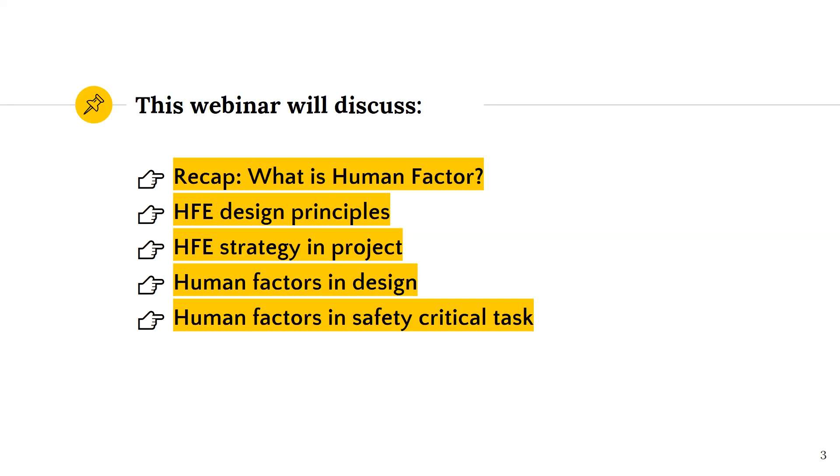What we will discuss today, in maybe less than an hour, we will try to recap what is human factors, because the title of the webinar includes HFE. Hopefully the participants who registered for this webinar understand what HFE, human factors engineering, means. We'll try to cover the HFE design principles, HFE strategies in projects, and human factors in design. I'll divide it into two parts: human factors in design, and human factors in safety critical tasks. But I'm not sure whether we have enough time to cover the last topic, since it's a very huge topic to discuss. Maybe we can cover up to human factors in design, and arrange another session for the last topic later. But if we have time, I will cover a little bit of it.

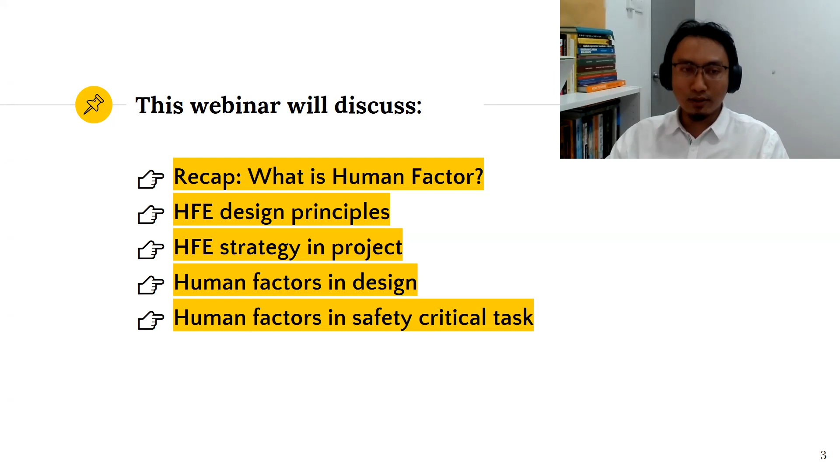Along the presentation, I will share the major challenges based on the slides I prepared for you guys. So, what is human factor? This is a definition by IEA, but I hate to start with this kind of wordy definition. I would like to start with a simple situation instead.

How do we understand human factor? This is a toilet door, maybe at our home, with a lighting switch, and we have a laundry basket there. That's the common arrangement in the house, in most of our houses. That's the design of the lighting switch.

So one day, maybe during this webinar, our children want to wash their hands in the toilet and ask us to switch on the light. Because we focus on the webinar or other work, we cannot attend to our kids. Let's say our kid is around 5 years old, which normally understands how to use the toilet.

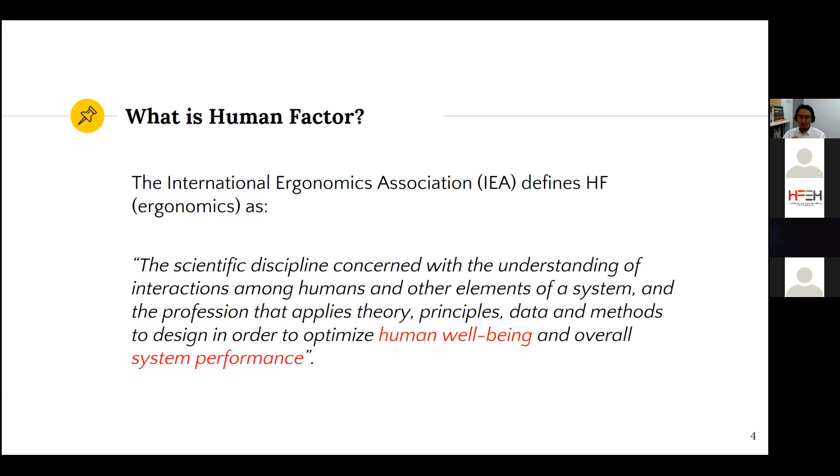That's a very simple analogy to understand human factor. So if we go back to the definition by the IEA, there's a combination of knowledge applying theories and principles, but the end goal is to optimize human well-being and system performance. So it's exactly what we did for this toilet switch.

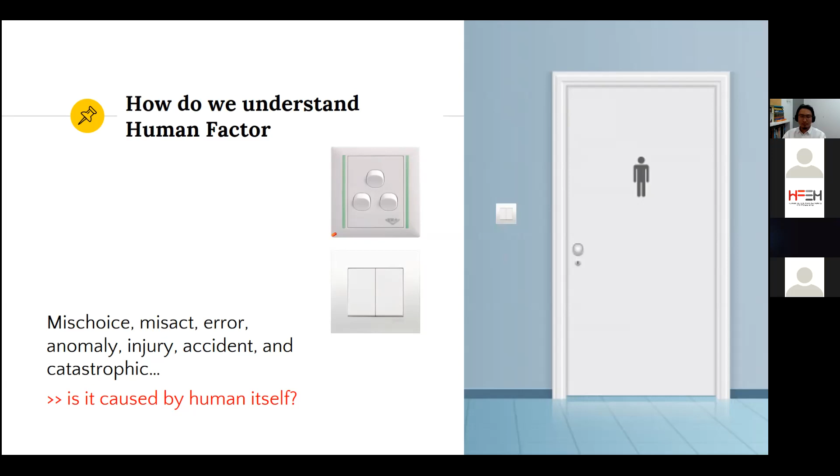And at the same time, when we lower this down, first our kids can use it safely, and secondly, we design for the disabled person using a wheelchair and so on, especially in public areas. So that's human factors - factors that affect human performance, right?

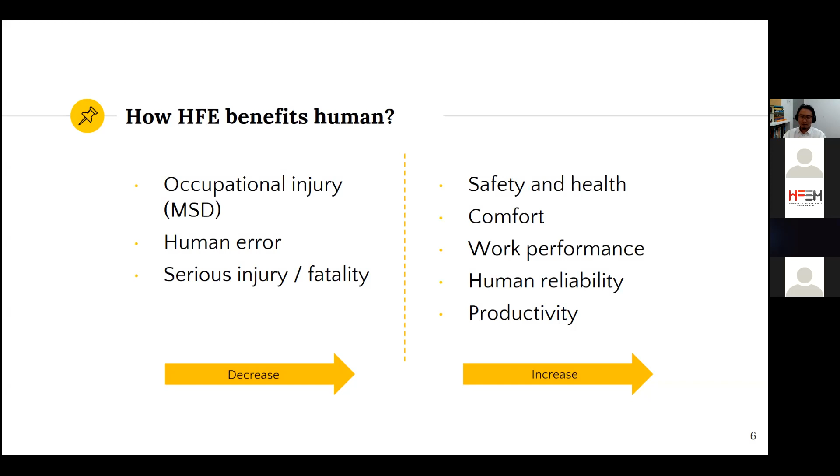So what we gain from this modification is we have decreased human error or accidents, or in the wider concept, we decrease occupational injury in the workplace and increase safety and health, and increase the comfort of users in work performance, human reliability and productivity, which covers a broad scope of workplace design. So that's human factors.

But within these facilities there are a lot of components, not only the lighting switch, but a lot of components that build this FPSO. For example, this is the structural system for the overall topside of the FPSO. You can see all the components of the structure.

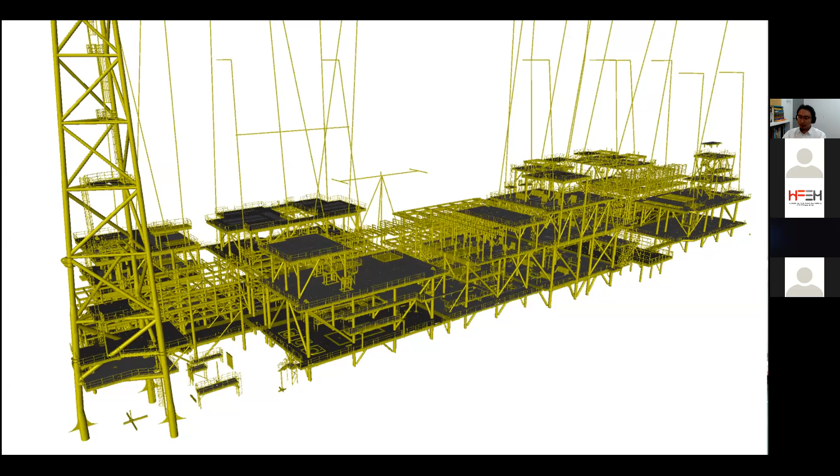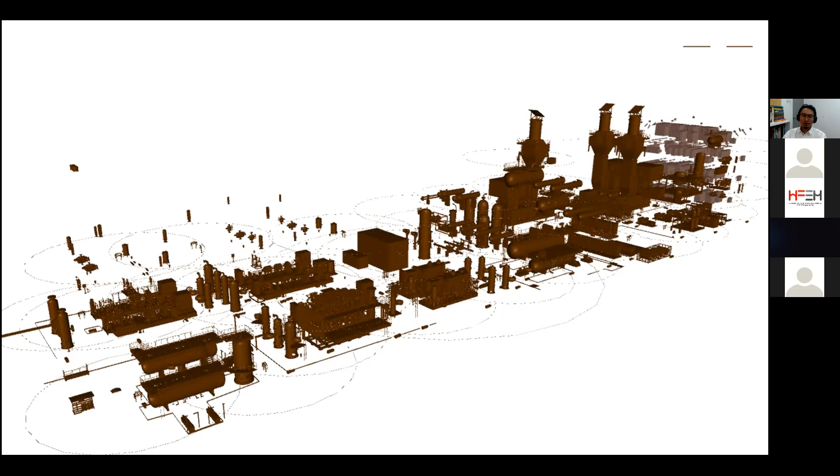At the same time, we have a mechanical system. There's a lot of mechanical equipment to store or process, to generate power, to generate water, HVAC equipment. At the same time we have electrical, we need to transfer the power and make this live in the facility, so there's a lot of electrical cables going around.

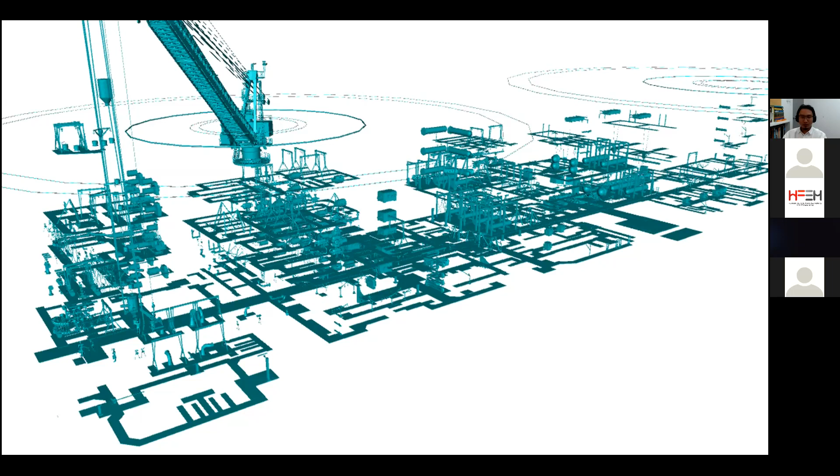And this is a material handling system for maintenance and operations. Within the same place we want to integrate the material handling system within the FPSO, so all the systems create this complete FPSO. That's why we call it that.

At the same time, during operation, people will operate this facility and live there, maybe up to 20 years, operating and maintaining these facilities, involving human interaction with all the systems. So we call it a complex socio-technical system, where we need to address human factors concerns in the design. So how are we going to implement this?

With this complex system, it involves a lot of other factors. For example, we have equipment, organization, environment, tasks and procedures, and people itself. All these components have detailed items. For example, equipment involves technology, the layout of the equipment, and HMI.

For tasks, we need to operate the equipment, do inspection, calibration, and maintain around 20 years, and we need to do material handling to replace any component in the system. All these components will influence human behavior, action or inaction throughout the lifetime of the facilities.

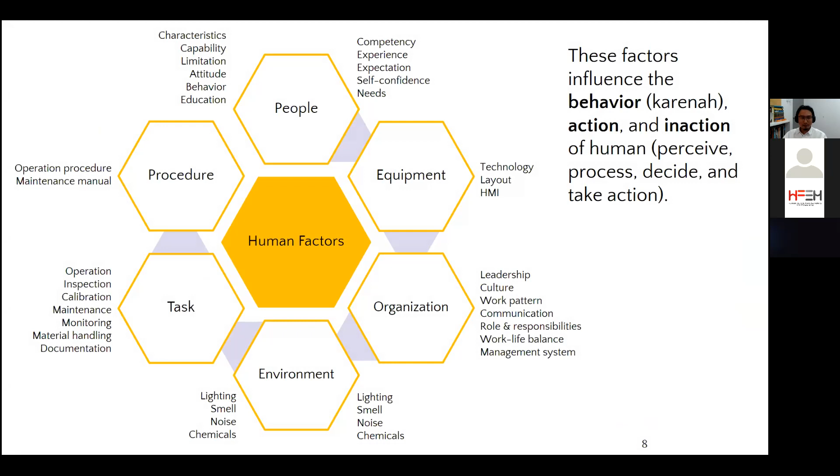So when we design the equipment, when we design the tasks, when we design the procedures or environment, we will consider all these design principles. We integrate everything in the facility.

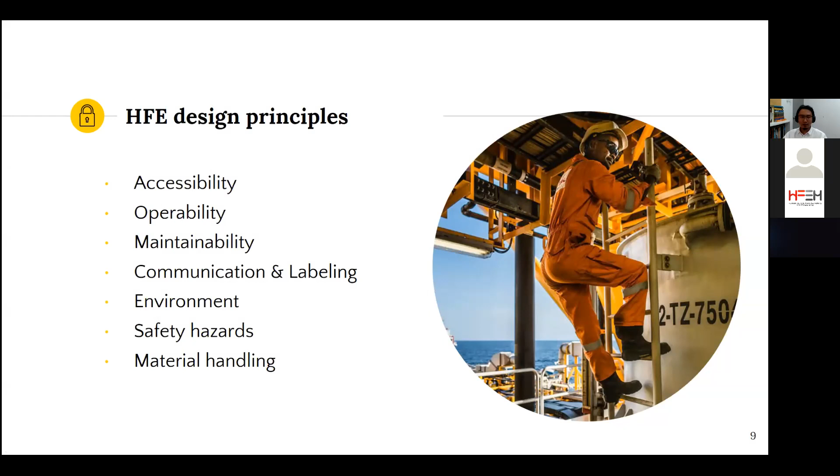So what are the complex systems that share the same concept with oil and gas? It could be palm oil plantation processing, because it involves a process line, manufacturing plant, oil refinery, of course, a nuclear plant, healthcare, OT is operation theater.

This is very important because when you involve a very precise operation - for example, I have experience with my daughter, my daughter has a heart disease. So when we went to IJN for the operations, we were given the opportunity to enter the operation theater, which is a very complex operation theater in IJN for heart surgery. So I could see with my own eyes how advanced the facilities and the setup of the OT are for the precise heart operation. So a lot of human factors are involved.

In fact, a lot of stories we heard from IJN about failed operations or human error during operation that caused heart bleeding and so on.

Okay, military base, of course, airport and control towers - we have Captain Kanadia, I think he's an expert on airport and control tower HFE things. And the railway system, for example, MRT or LRT system, involves a lot of human machine interface.

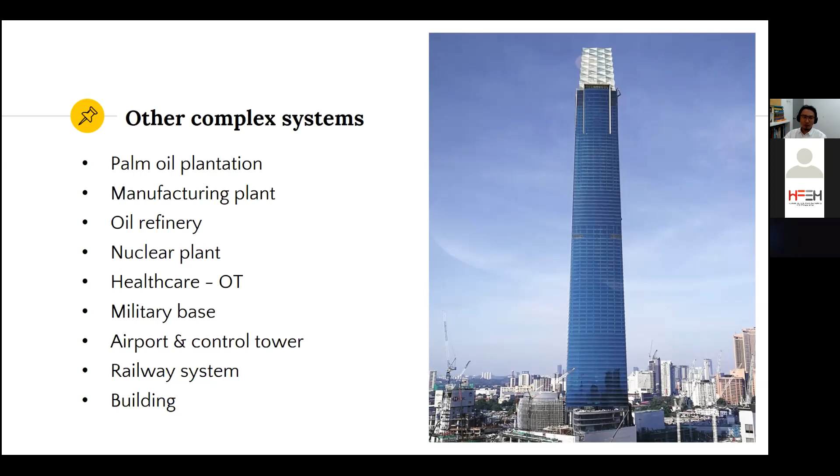This is the engineering design stage in oil and gas. So I believe our participants from the oil and gas industry understand this flow. But for other industries, I believe they have their own design stage.

Basically it's almost the same - maybe they apply the same concept, which is starting with conceptual select, or we call it select - some clients call it select, but some clients call it conceptual. And we move to front end, which is the defined stage, and we go to detailed design, construction, and operation. So for the HFE implementation, there are a lot of activities there, but we need to align with the purpose of each phase.

For example, during front end, what is the purpose of this phase during the design stage? They want to study the technology, explore its availability, finalize the size and weight of the platform, and come up with cost estimation to develop the facility. After they finalize that, they go to detailed design and produce drawings for construction.

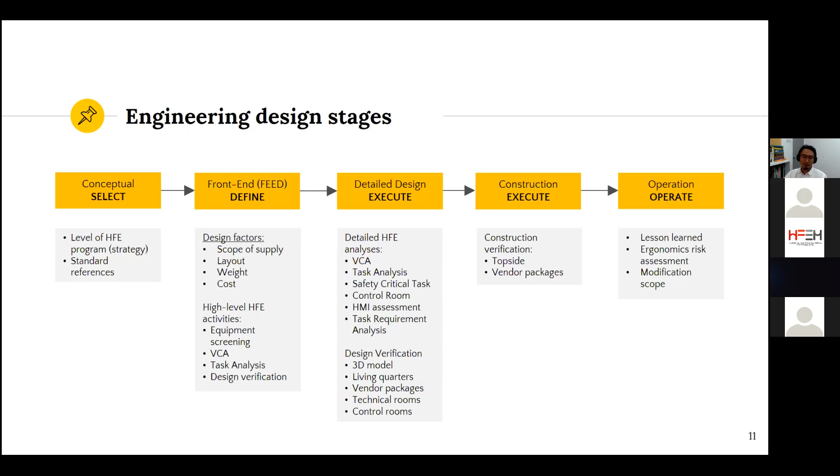Okay, so it goes up to the operation phase. But for this detail, I think before this we had the webinar about engineering design stage for HFE implementation, delivered by Dr. Adil himself. During that time he already explained in detail, stage by stage, the HFE implementation, so I just cover the very brief one.

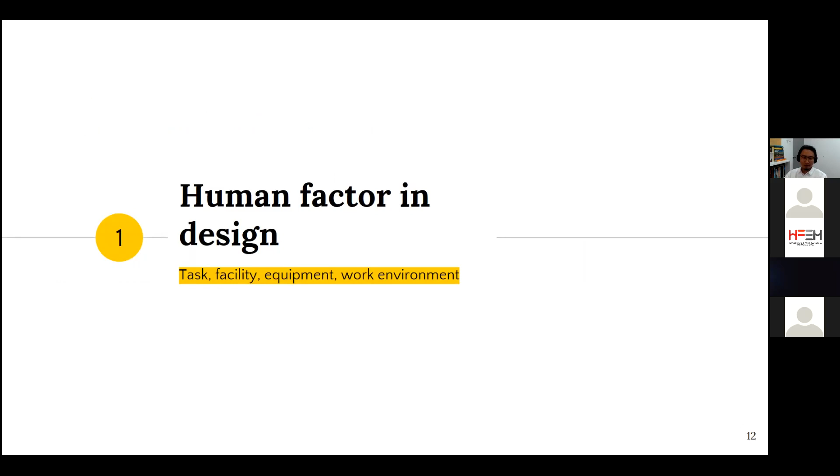So we try to look into human factors in design and what is the challenge along the design process. I'll share a very simple item that we tried to improve in terms of HFE for ergonomics.

This structure is under the structural discipline, so what I did is contact the structural discipline. They said this is not finalized yet, meaning there is a possibility that I can suggest a better design considering the ergonomics factors.

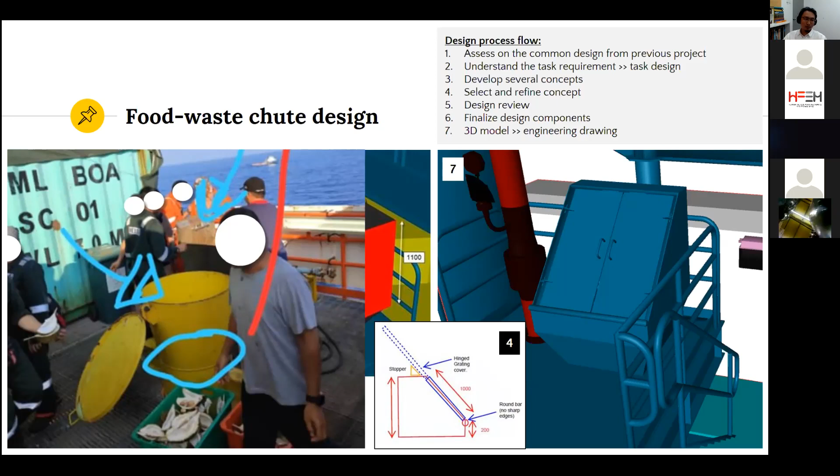And then what we can do is try to explore several design concepts, because we already understand the standard waste bins they use, and the task sequence they do for this activity. So we try to develop several concepts to improve the design.

If you can see number 3, this is the first concept that did not happen, and number 4 is one of our friends who happened to suggest this better design. After we discuss, we do the design review and finalize the design component, coming up with the 3D model like this, which has a door to avoid people falling down, is slightly lower, and has a round bar to support the bin load so you can dump into this food waste chute with less effort and safer. That's the final design.

We generate engineering drawings and construct these items. Of course, the design can be argued, but as long as we can justify it, this is a good design. We have designed the task properly to mitigate the ergonomics risk. That's a very simple example of how the design process happens.

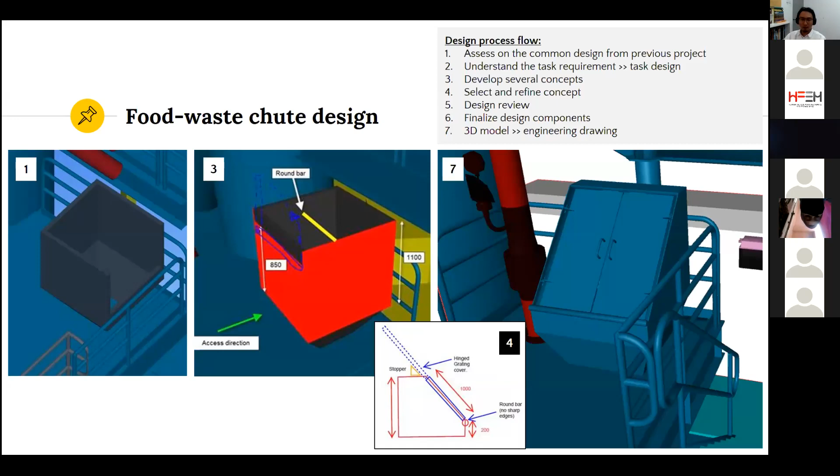We go to a little bit more complicated design, which is a piping system design. Normally there are several steps when they design the process piping system. Normally they start with the P&ID, or before that they have a PFD, process flow diagram, which is very general.

Later they detail it up in the P&ID. P&ID is a piping and instrumentation diagram. So in the P&ID, I can show the development of the piping.

The P&ID is very simple. There is one line here, and there is a valve. From there, we can identify the type of valve and whether it's normally closed or normally open. And there is a PSV there.

During this P&ID stage, from the HFE point of view, we do the valve criticality analysis. We do the valve categorization, categorizing valves according to C1, C2, or C3, depending on the criticality of the valve. Normally a manual or standard valve we put as C2, and a critical valve like a shutdown valve we put as C1, for example.

From there, we determine the accessibility requirement, whether we need a proper platform or can operate from a ladder. At the same time, we propose a design recommendation. If the valve needs to be CSO, car seal open, or maybe there's a discussion to change the type of valve from manual to motorized because of the operation requirement.

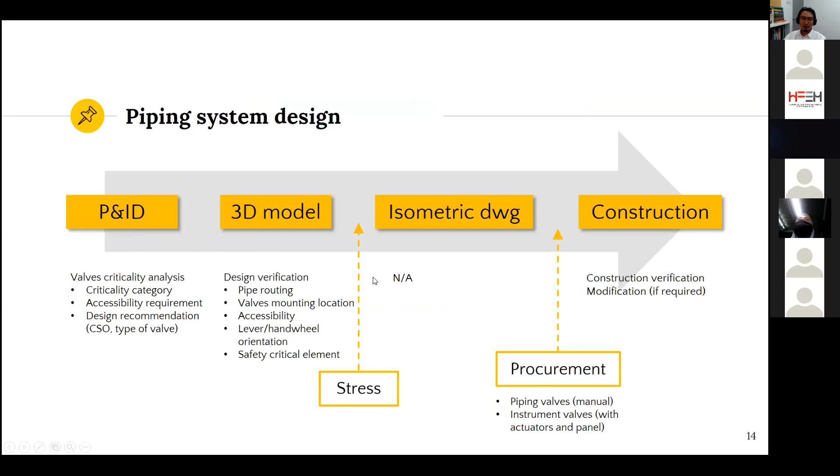So the challenge is how HFE can cope with or intervene through this process. When they do the construction, if you see the line, it's exactly like the 3D model, but at the same time there's a cable tray, an instrument pole, and structural elements. We need to consider all this in the 3D model design verification.

So we need to take care of the space availability to access the valve and to climb up the ladder.

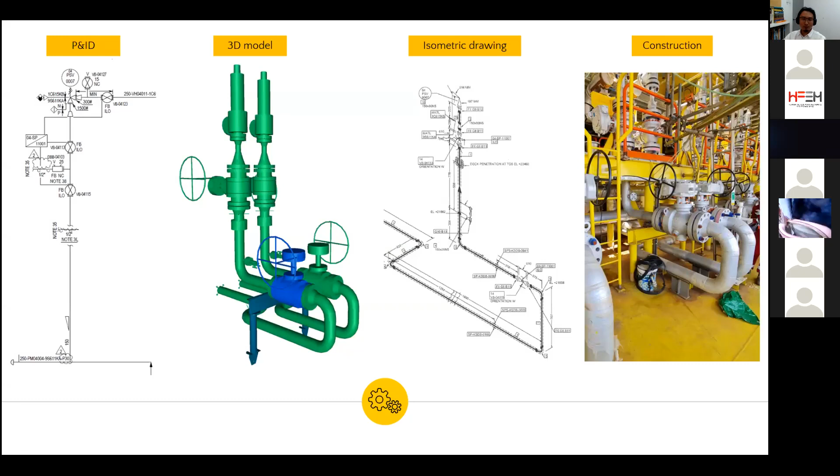So, all right. This is a piping, which from the one line perspective we can say it's straightforward, but when we combine for the whole facilities, it's quite complicated exercise, and we need a proper HFE intervention.

Another system design I want to share from HFE point of view. I found that HFE practitioners rarely discuss this, but for me it's one of the most important systems in the facility, because throughout the lifetime, let's say 20 or 25 years, there's a lot of maintenance activities. We need to replace components, change filters or membrane tubes, so we need to provide the system to help operators or workers do their job.

So material handling is basically moving components from one point to another by lifting or lowering, transferring, pushing, pulling, hoisting, and transportation between points.

There are main components in the system: the first is the laydown area, normally accessible by crane, and there are handling routes. When you want to transfer from one point to another, we need to design the handling routes with sufficient capacity to cater the weight of the components. And we have a hatch opening, storage area, and a crane. These are the main components we need to design for this operation.

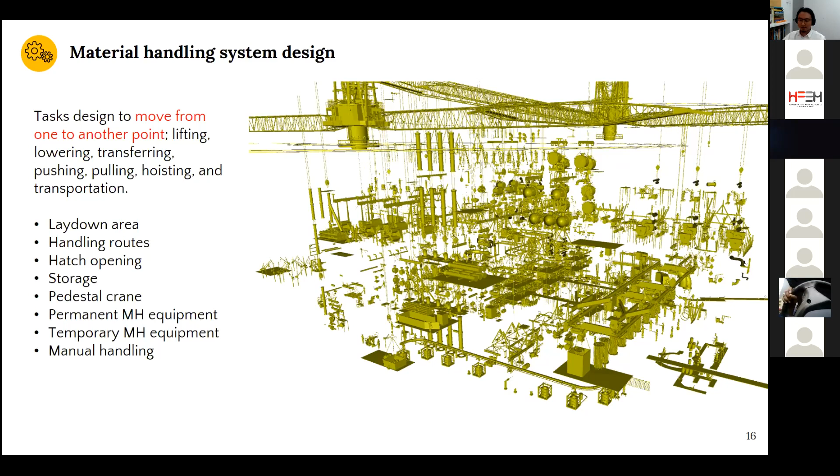If you see these items, maybe up to 10-ton weight—it's like a container trailer weight—but we need to handle it within this platform. So there's a lot of challenge here. We can talk about this in detail in a separate session, but this is a major challenge for HFE.

After I explain several samples of how we do the HFE studies and how we implement the HFE strategies, for the simple items, or for the piping system and the material handling system.

This is the overall design process as a whole system. We have multiple disciplines working in different teams, but they dump all this equipment or items within the same facility. For example, this is just an indication—this is not the actual schedule or Gantt chart.

For example, M1 is the first month, second month, third month, up to fifteenth month, and final design. Each discipline works on a different schedule, because they release the specification at the first month, then contact the vendors and develop the design of the equipment, delivering in different months. Same for structural, electrical, instruments, HVAC, and technical safety—they work on different schedules. But we have a common milestone, which is a 60% model review. Let's say I put it at the fifth month.

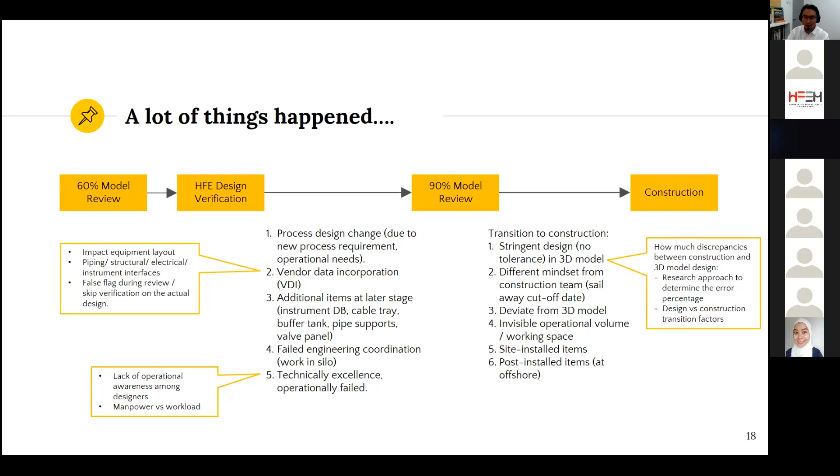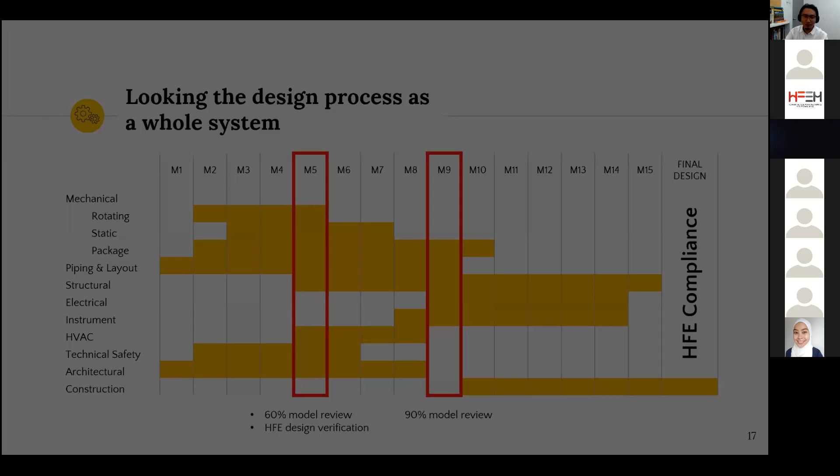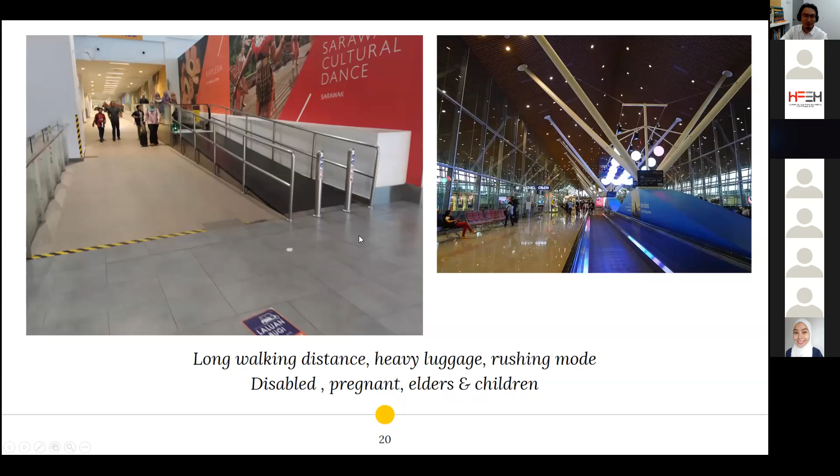Okay, I think this is the second part I want to share.

Along the design process, there's a lot of involvement by engineers and designers, and of course the HFE team. We have HFE teams to review the model and give suggestions to the designers on how to improve the accessibility of the design. But actually, how HFE people think and how designers think, and their ability to design according to human needs, is different.

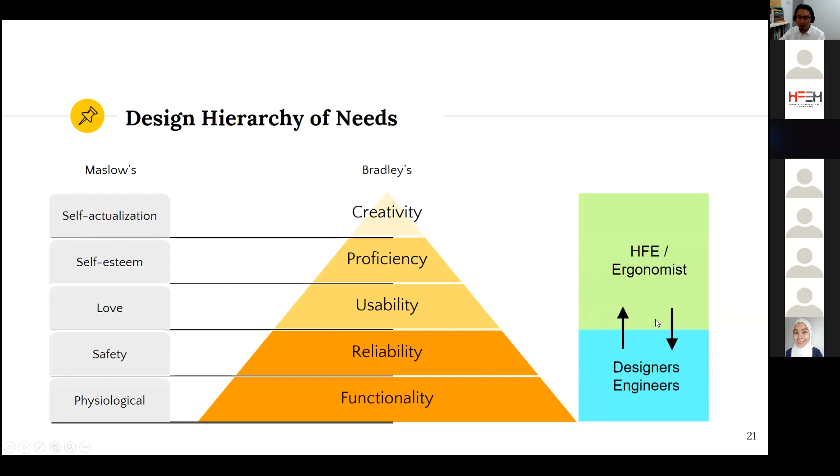So designers, when they design, need to design right in the first place and consider usability. I think this area is a gray area—some designers understand the usability requirement very well, but some are still focused on the technical parts, which is functionality and reliability. So proper seminars or training should be done to close this gap or break this barrier.

When we want to design something, I always ask myself: do I really understand human characteristics, capabilities, and limitations? Can I anticipate how humans perceive or process information, make decisions, and take action?

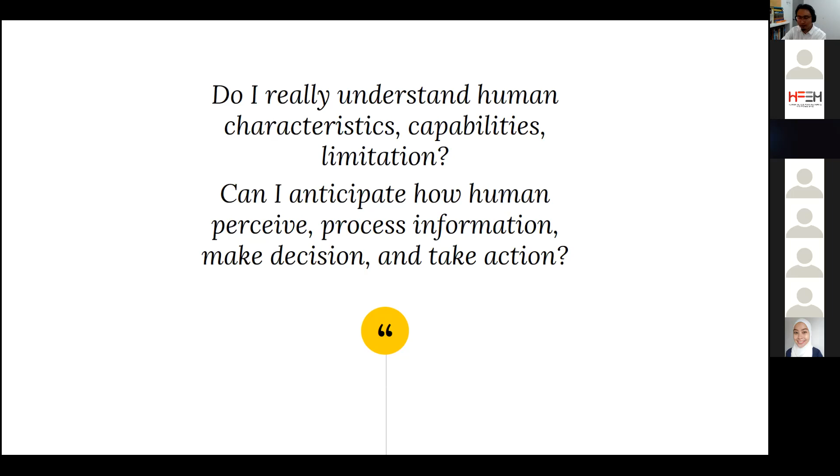This is a challenge to the designers and to the HFE practitioners as well, because we don't remember all these details. For example, anthropometric data. Maybe we know the average height of the Malaysian. Some study said 1.68, and the highest is 1.79. We know that, but how about the detail when we want to apply it in the design?

In the oil and gas industry, we have this kind of standard. There is a lot of standards that we can apply. For example, the famous one is HFEM. This provides a very extensive design specification so that we can apply it in the equipment or facility design. So there's a lot of standards there, including if you do the Shell project, you have the DEP, and if you do the Petronas projects, you have PTS.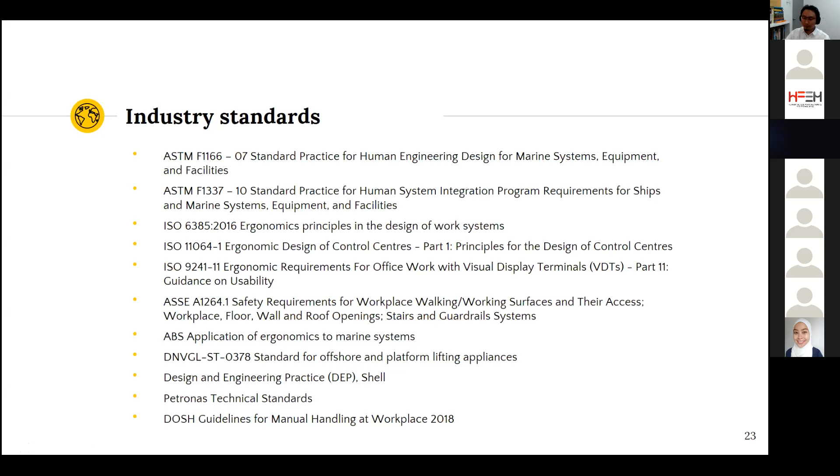In fact, they've got guidelines for manual handling in place. But there is a certain area - sorry, before that - from these standards, we can generate the HFE specs.

In fact, there are cases where they don't follow, but when we want to verify the design, we will use this standard as reference. But there is a case where one designer came to us and said, we don't have the space. We just have 600, but we need 750. So how do we solve this?

They come to us. Sorry, our time is until what time? Ready?

Until 11, but I think we can extend a little bit, a few more minutes. Okay, I think if you guys have other things to do, because it's a Saturday morning, you can leave early. But I will continue a little bit, maybe another 10 minutes. Is it okay? Is the Zoom okay? Yeah, sure, the Zoom is fine, no problem.

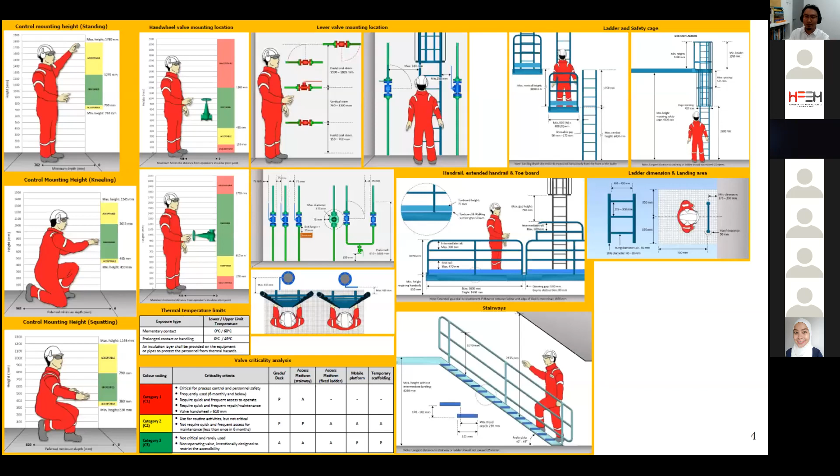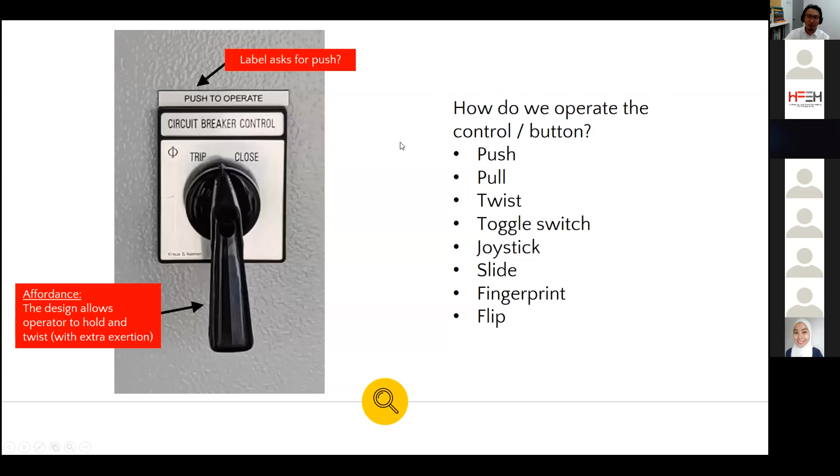If you see this, how do we operate the control button? This is actually what we call the mental model, because we're already familiar with all types of button design. Once we see it, we know how to push or pull, or whether it's required to twist, toggle a switch, or operate a joystick. There's also slide switches, fingerprint, or flip. So there's a lot of options to control the buttons.

But in this case, when we further investigate with the vendor, they say you need to push and then twist. Now the label says push to operate. So maybe this is not the emergency button or critical button, even though there is a circuit breaker control. But if it's a critical button and people push and nothing happens, this is not good design.

So what to do? From an HFE point of view, what can we recommend to them? We cannot change the design of the handle or the button. What we can do is update the label to say 'push and rotate to operate', so at least they can take the correct action to operate the control.

If the designers or HFE practitioners don't have this awareness or understanding of the design principles, this kind of problem will not be addressed during the engineering design or construction phase. So the bad design will go to the offshore facility and operate for 2 years, and we don't know what happened during the operation phase.

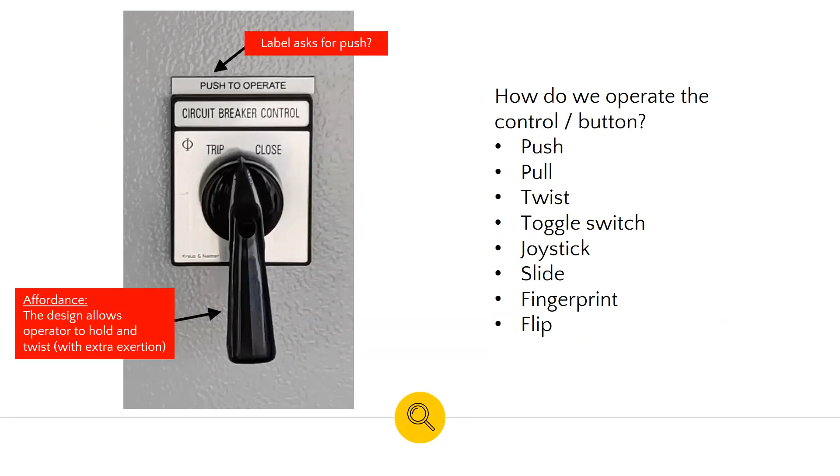Because what we concern is when we design the facility. For example, for this button, we end up playing with safety critical tasks. When people cannot find the correct button or the correct area to work or take action, there is a potential possibility that an accident can happen or escalate to catastrophe.

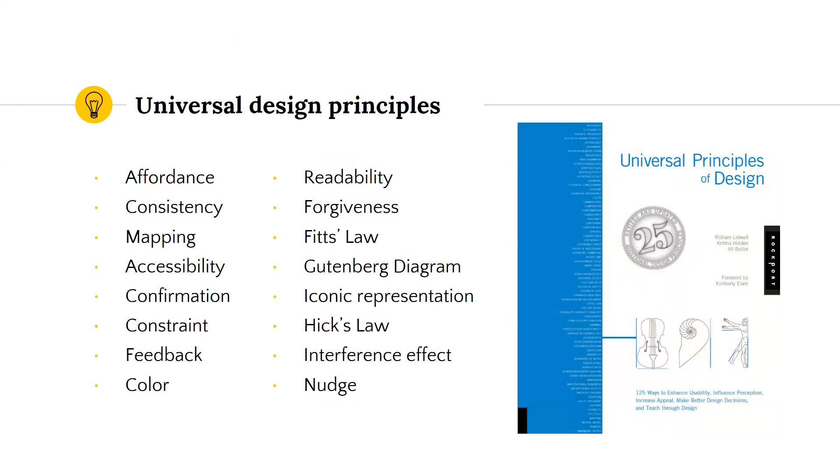Okay, so I think I want to stop there. It's a long presentation already, 1 hour. From here, it should actually jump to human factors in safety critical tasks, but like I said before, this is a very broad topic that we can discuss in a separate session. All right, with that, I end my presentation. Maybe you have a few questions we can discuss today.